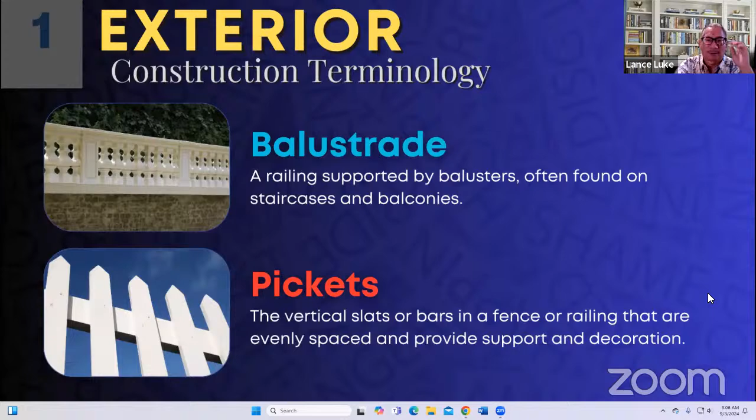If you look at a railing, the intermediate rails are also called pickets. So the balustrade could be pickets also.

I'm just going to breeze through. Facade, the front or face of a building. I think I took this photo on a trip to Italy or somewhere, I forgot where. So that's a facade—if anybody says it's a facade of a building, that's the front or face. If you go to Disneyland, there's a lot of facades, and in the back there's nothing. It's just the front.

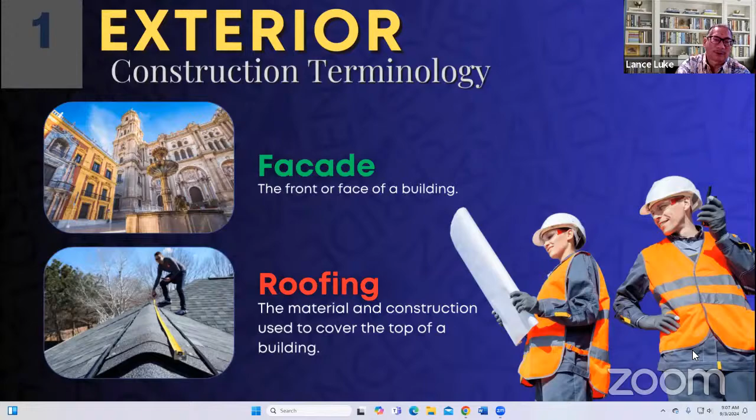Roofing. Roofing is a material, as you know, construction used to cover the top of a building. Roofing could be a verb or a noun, but it's used in different ways. We'll talk more about that later.

How about siding? It's pretty obvious—the siding of a house. Protective material attached to the exterior of a building wall. In old Hawaii, the siding used to be single wall construction, TNG. What's TNG? Tongue and groove—sections of wood slotted and fit together.

There's also siding called stucco siding, or EIFS. What does that stand for? Exterior Insulation Finish System, or EIF, Exterior Insulation Finish, or EIS, Exterior Insulation System. If you go around and look at new buildings, hotels, restaurants, and all that, it looks like stucco, but it's actually synthetic stucco. The definition is exterior wall covering that includes insulation and then the finished surface, usually more energy efficient because there are numerous layers.

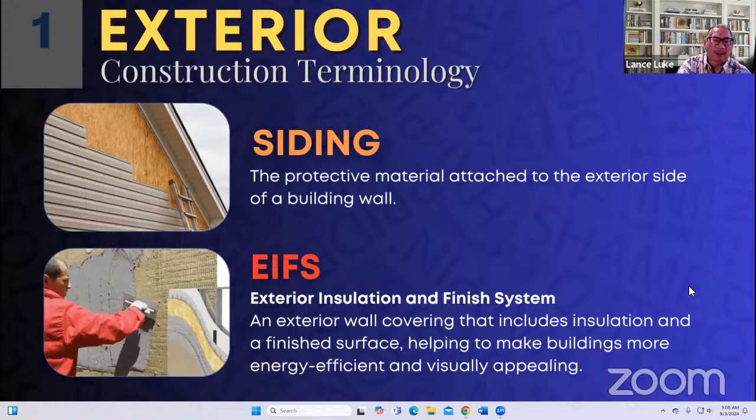If you look at the image on the bottom left, there's a little rectangle section that shows the different layers of this stucco. So we just call it stucco, but if you want to get fancy, you can call it EFIS or EIFS, Exterior Insulation Finish System. When it first came out, there was a lot of leaks into buildings on the mainland because they really didn't know how to apply it.

Cladding is sort of like siding. It's a covering or coating on a building exterior for protection, or sometimes aesthetics.

Now, I threw in this picture of the Grenfell Tower. I was up there in May, and it's a memorial now because the whole building caught on fire, and it was due to cladding. They had this material added to the side of the building, and lo and behold, it wasn't properly fire-rated material. It just caught on fire, and the whole tower was basically on fire.

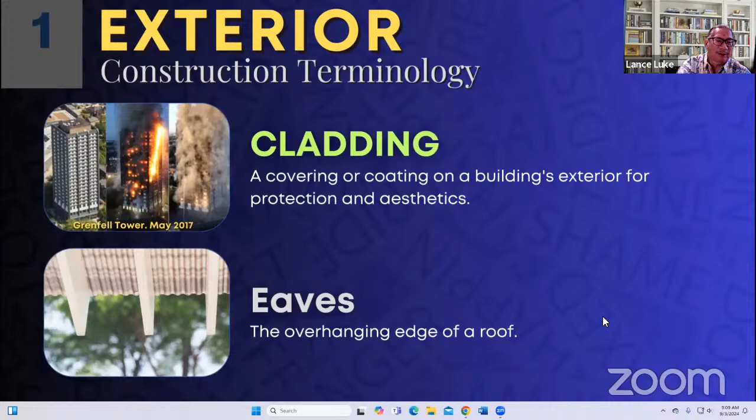So that's cladding. Eaves is the overhanging edge of a roof. If you look at the image, you're standing above it and looking out, and that's the eave.

Let's talk about railing. There's a difference between handrail and guardrail. You may ask, what's the difference? The handrail helps people keep their balance for safety while walking up and down stairs, a ramp, or a slope walkway. A guardrail is actually a protective fence or railing to keep people safe from dangerous drops, and usually a guardrail is on flat areas. A handrail could be flat or vertical, like on stairs or a ramp. A guardrail most of the time is horizontal on flat surfaces, and appears on stair landings, lanais, balconies, and so forth.

So there's a difference between handrail and guardrail. Most times, the guardrail—you don't put your hand on it; it's mainly for decoration, although you could if you're on a hotel lanai or visiting somebody in a high-rise townhouse.

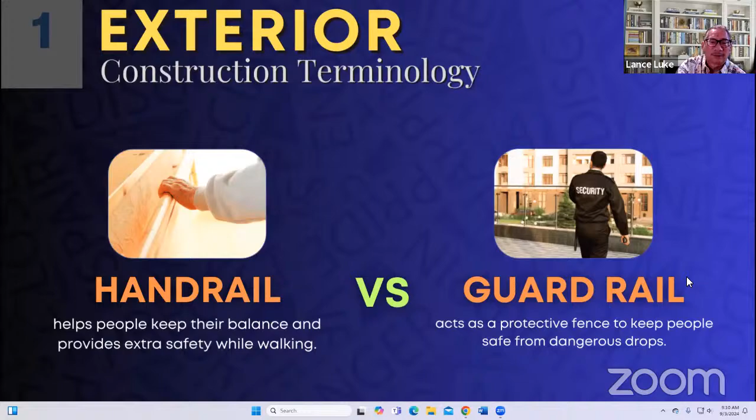Talking about stairs, here's where people get confused. Your contractor talks about a tread or riser, and you're like, what is that? Well, I put a nice photo here. The tread is actually the step of the stairs—that's the tread. The riser is the vertical part. So the tread is horizontal, which is the step, and the vertical riser makes up part of the stair. Just remember, the tread is the flat surface you walk on, and the riser is vertical—you don't walk on that.

How are the tread and riser connected? There's a vertical diagonal piece of wood or concrete, or other material, called the stair stringer. That stringer is a structural support that runs along each side of the stairway, or could be in the center of a staircase, holding the treads and risers. This is a wood frame, but the whole stairway could be made out of stone or concrete, and it's pretty much the same terms.

So it doesn't matter what kind of material your stairway is made out of, you're still going to have components which consist of your tread, riser, and your stair stringer. That's just some information to help you.

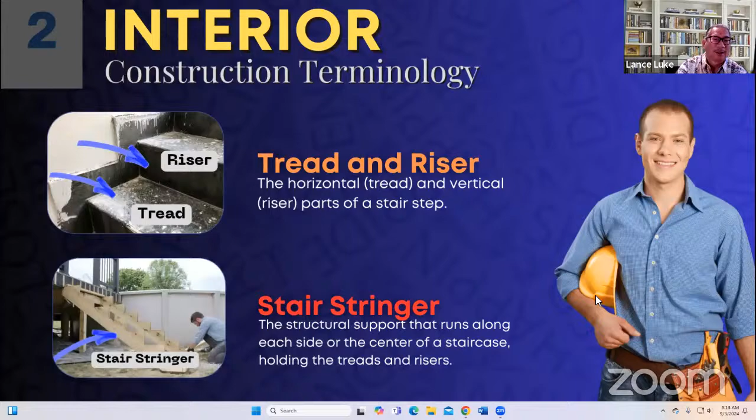Crown molding - why is it a crown? Because it's at the top. So the molding is a decorative trim where the wall meets the ceiling. I didn't even know what crown molding was, because in Hawaii we don't have too much of that unless it's really expensive houses. I learned about it when I had to go to the mainland and take tests for inspection certification. That's how we figured out what it was.

So that's crown molding. You also have other molding - if the molding is at the base of the floor, that's your baseboard. It could be base molding or baseboard. If it's in the middle, like in a dining room, they call that your chair rail. What that is, when you're putting your chairs against the wall, it doesn't make big holes in the wall.

Okay, everybody heard the term drywall. What is drywall? Drywall is actually panels made of gypsum used to create walls and ceilings. So in the old days, everything was made out of wood, right?

Log cabin houses made out of logs, and later on they decided to mill the logs into wood. So you have 2x4, and you have your plywood siding. And the houses were built like that, all wood. Then later on, drywall was invented and said, wow, okay, let's use drywall. So we'll make the house walls and ceilings out of drywall. It's easy to work with. I'll let you know later on down the presentation more about the drywall finishes.

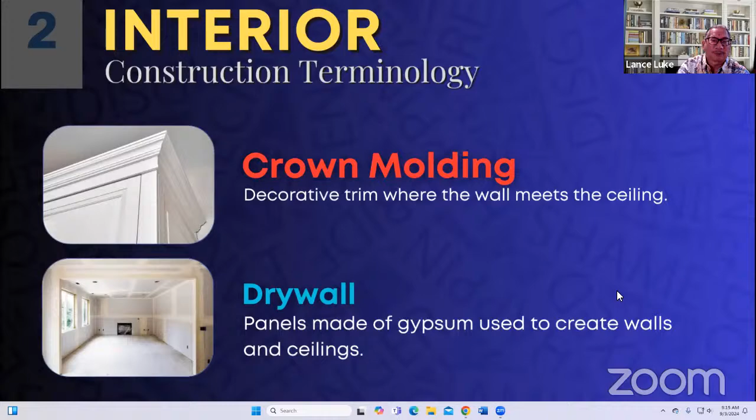There's different types of drywall finishes. What's a stud? Well, somebody like Martin, he works out, but in the construction term, the stud is a vertical framing in walls. The material could be wood, metal, or concrete, but normally if it's concrete, it's called a column. So the stud is a vertical framing member in the walls, and that's what you attach your drywall to.

Wainscoting is a decorative protective panel on the lower part of a wall, but then also the term is used for bathrooms, and that's your tile work.

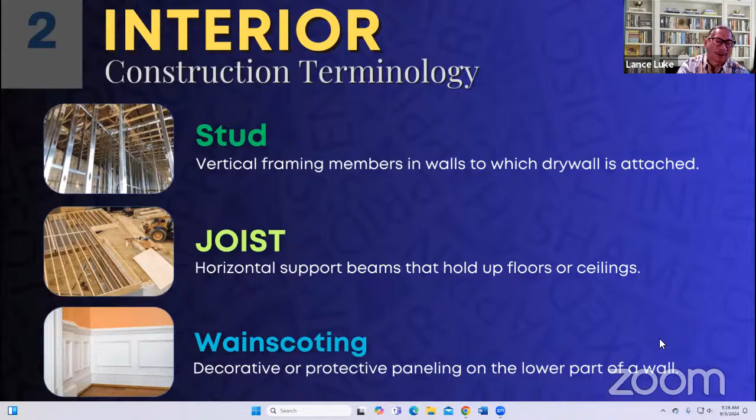A conduit is a protective tubing like a pipe, and they run the electrical wires through that. So the purpose of the conduit is to protect the wires, and also so you don't have a bunch of spaghetti wiring in your walls or ceiling. It just goes through one or two or several conduits.

Circuit breaker - you know what that is, but the proper definition is a switch that automatically interrupts electrical flow in case of an overload or short circuit. I had a call like, oh, something's wrong, my circuit breaker keeps tripping, and every time I switch it on, it trips again, and then I don't have power. They said something's wrong, can I tape it? And I said no, the reason why it tripped is because something is wrong and you need to fix it. You can't just tape your circuit breaker to make it stay in the on position. Your whole house might catch on fire because we don't know what the problem is - could be an overload, short circuit that could start a fire.

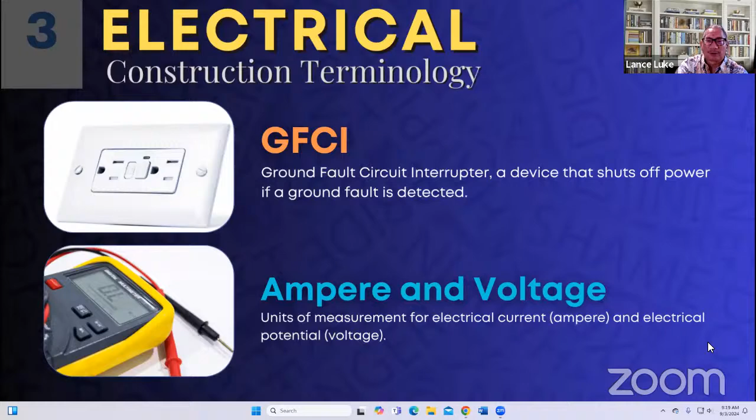Amps and volts, ampere and voltage, units of measurement for electrical current. Electrical current is the amps and electrical potential is the voltage. I'm not going to get too technical in that. What you need to know is just call an electrician if you have problems. Don't try and fix it yourself.

Moving on to plumbing, where we got water flow. There's a shut-off valve, a valve used to stop the flow of water in a plumbing system. In a single-family house, there should be a shut-off valve somewhere between your water meter and your house. If your house is super old, you might not have a shut-off valve, and the valve used to shut the water off would be inside your water meter, which is basically owned by the Board of Water Supply, and you can't touch it.

A vent pipe allows air to enter the plumbing system to maintain proper pressure and flow. If you didn't have vent or air, the water wouldn't flow as properly, and if you flush your toilet or use your sink, it might get clogged because you need the air. You need the airflow.

By the way, any of the terms that I mentioned in this webinar apply to anywhere in the US and even the world. It's pretty much the same.

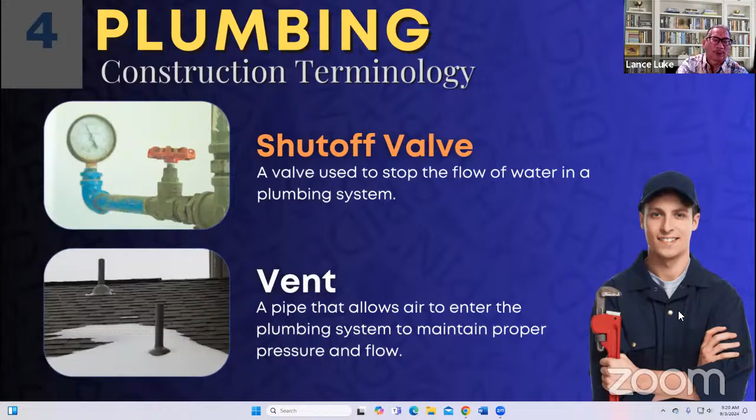Sink drain pipe, there's a P trap, S trap, other traps, but the traps are to prevent sewer gases from entering your house or building. And the reason it's called P is because it looks like the letter P, or the S looks like the letter S. A backflow preventer is a device that stops contaminated water from flowing back into the clean water supply.

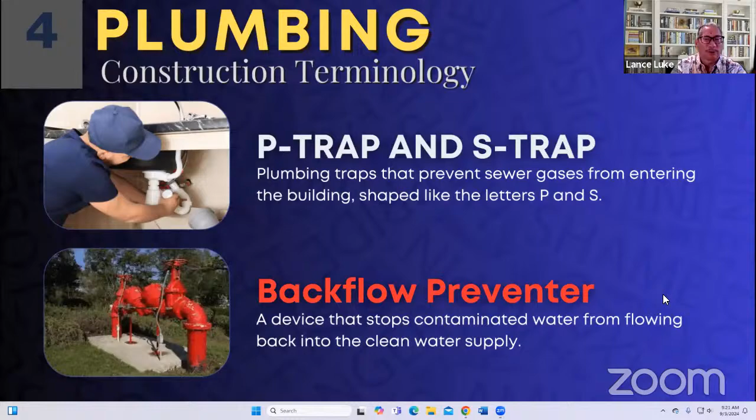Now, if you live in a condo building and you don't have a backflow preventer, you should add one. A lot of older buildings that are redoing their wastewater piping, the city Board of Water Supply is requiring the installation of a backflow preventer, so there's no grandfathering in. You have to do it, otherwise you won't get your permit.

Engineering terms, structural analysis. Well, it's an assessment of a structure's ability to withstand loads. Now, a structural analysis could be reviewing plans before the building's built. It could be inspecting the building during construction. It could be an analysis after the building's built to determine whether it was built properly, or later on, years later, if the building suffers from some failures, that's another structural analysis.

Okay, retaining wall. That's pretty easy. A wall built to hold back soil or rock from a building or land area. And your retaining wall could be made out of anything, any kind of material, block, tile, rocks, wood, reinforced concrete. So all kinds of different materials.

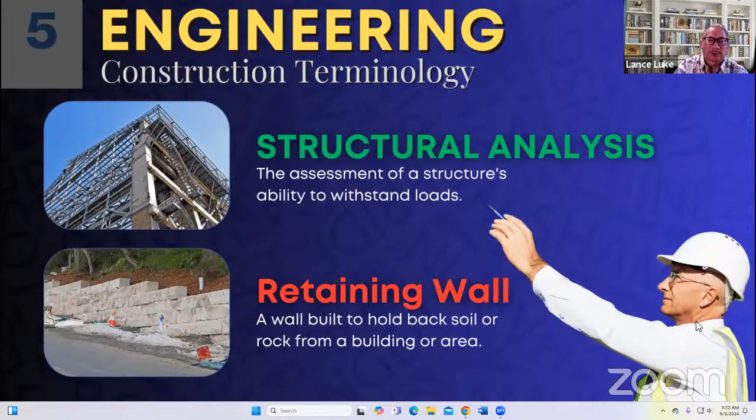Some more engineering. Reinforced concrete is basically concrete strengthened with embedded steel bars or mesh. So the steel bars, it's called reinforcing bar, and the short term is rebar. So when you think of rebar, that's those metal bars that are used. Now, sometimes in driveways, like a single-family house, it may be overkill to use rebar in your walkway and driveway, so they use mesh, which is welded wire fabric, they call it.

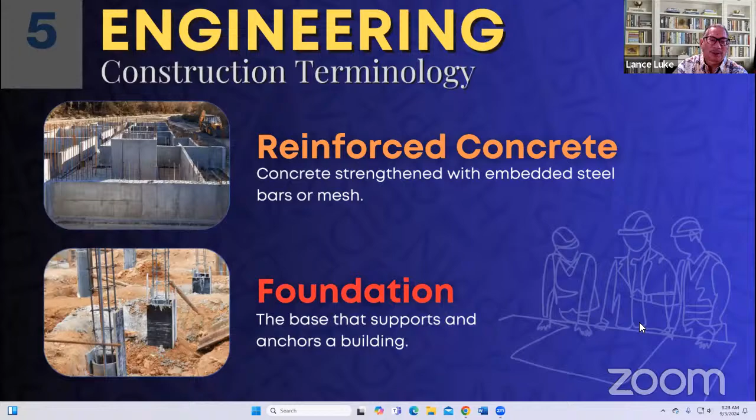And then foundation, the base that supports and anchors a building. So sometimes foundation or footing could be used interchangeably, but it all depends. Let's talk about other terms that don't have to do with building components.

Scope of work. What is that? So when the contractor says, what do you want us to do, we're going to make a scope of work. Well, basically, it's a detailed description of the work to be performed under a contract. When I say detailed, it should be detailed. So let's say you're building a house or having an addition made. There should be a scope of work that's pretty lengthy. It shouldn't be one sentence: we will build an additional bedroom for you.

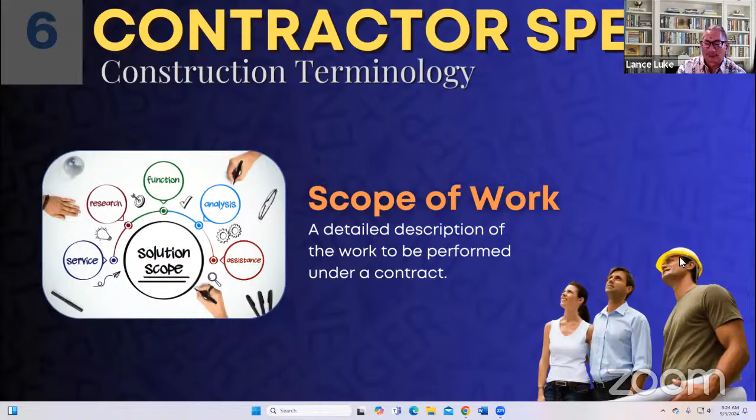And here's the cost. Okay, you want to know what the various components are. I'll talk about that a little later. It's interesting, and you'll know.

What's a bid? Well, you go to an auction, and if you like the item being auctioned, you raise your hand. You're usually holding a piece of paper with a number. Martin and his wife used to go on a lot of cruises, and sometimes on these cruises they have art auctions, and you like a piece of painting. Here's number 24, blah blah blah. The starting bid is $1,000, and then Martin raises his hand, 1,500. So that's different. That's an auction bid.

Okay, that's bidding. This bid in construction is basically a proposal to perform construction work at a specified price. Sometimes the word bid and the word proposal are used pretty much in a similar fashion, but I'll talk more about it later, and I'll clear that up.

A change order, what's that? Any change to the original contract. So it's a document that modifies the original contract agreement. Now, there's a caveat. There could be numerous change orders, but make sure it's in writing. The verbal ones don't cut it. In the projects that I work on, it has to be in writing. Otherwise, if it's not, the contractor doesn't get paid. Okay, so keep that in mind.

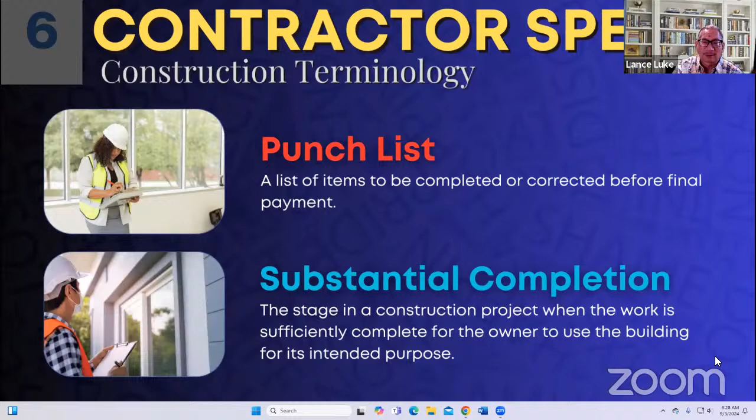So there's a difference. Flashing, let's talk about roofing. Flashing could be on a roof or could be part of a wall. Material used in roofing and walls to prevent water from seeping into joints and seams. So you could have what's called your roof to wall flashing, and you could have a wall to wall flashing. So there's different ways to use the flashing.

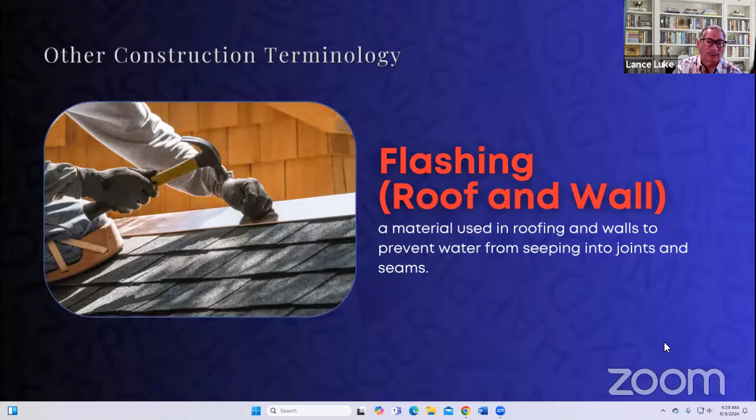Okay, here's my favorite, 2x4 lumber. What's a 2x4? That's a piece of lumber, right? Could be a stud like Martin. Well, that's fine. The 2x4 refers to lumber with a nominal size of 2 inches by 4 inches, typically used in framing.

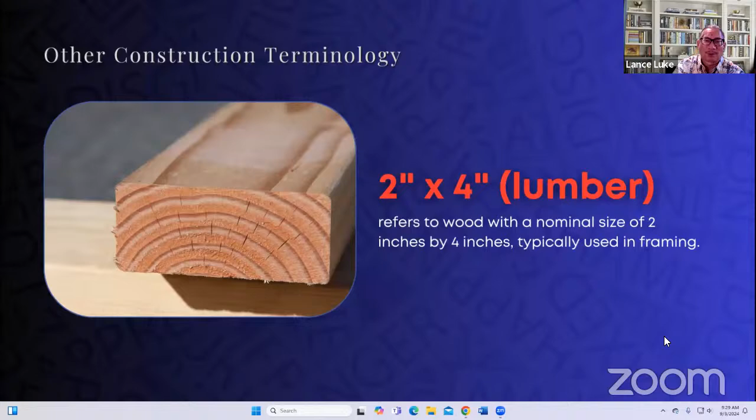Okay, that's a 2x4. But did you know that the dimensions of the lumber today are not 2x4? They go, well, why did they call it 2x4? Well, in the old days, okay, it was 2x4, it was actually 2 inches by 4 inches. So there's what's called nominal versus actual size. The difference between the labeled size and the true size of materials like lumber or pipes. But in this example, we're talking about lumber. So in the old days, it was actually a 2x4.

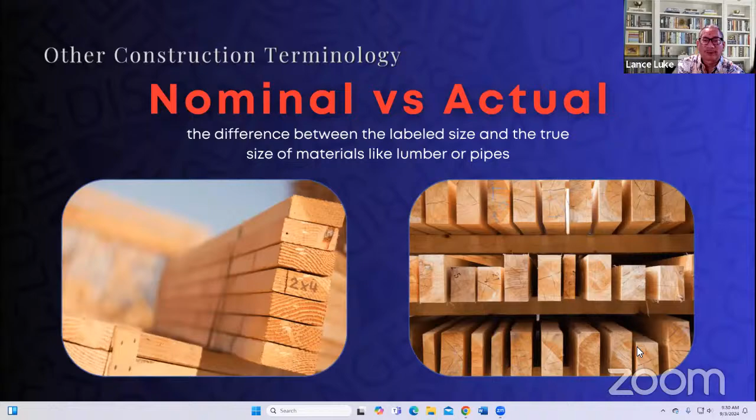What is it today? It's called a 2x4, but the dimensions are not. Okay, the nominal is the actual size of the wood before milling and before it gets sent to Home Depot, let's say, or Lowe's or City Mill. So the original was nominal, 2 inches by 4 inches, but today's standard is actual: it's 1.5 inches by 3.5 inches. If you don't believe me, take a tape measure and go to City Mill, Home Depot, wherever, and go measure it, and then you'll see.

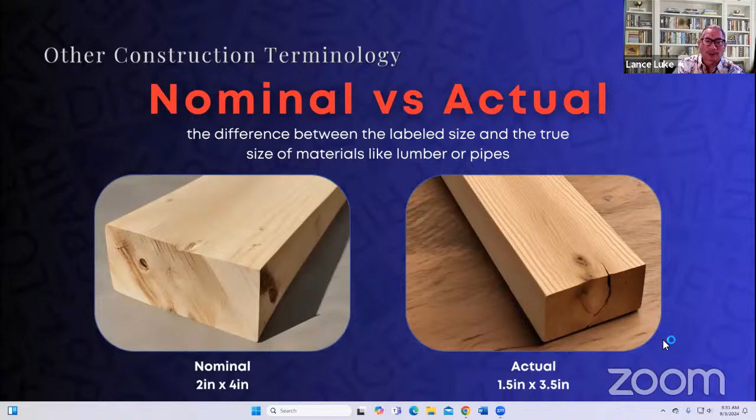And why is the difference? Because in the old days, everything was the nominal size, right? Now it's actual sizes. So it's not only 2x4, as you go through like 4x8, 4x6 beams and all that, it's similar. You got to cut off like half an inch from the nominal dimension.

You've heard the term 12-inch or 16-inch on center. A lot of contractors say, we're going to build this 16-inch on center and you're going to have solid walls, blah, blah, blah. But what does it mean? The definition: wood studs, 2x4s, are spaced 16 inches apart from the center of one stud to the center of the next. So if you measure your vertical studs and it's 16-inch on center, then that's 16 inches apart. That's what it means.

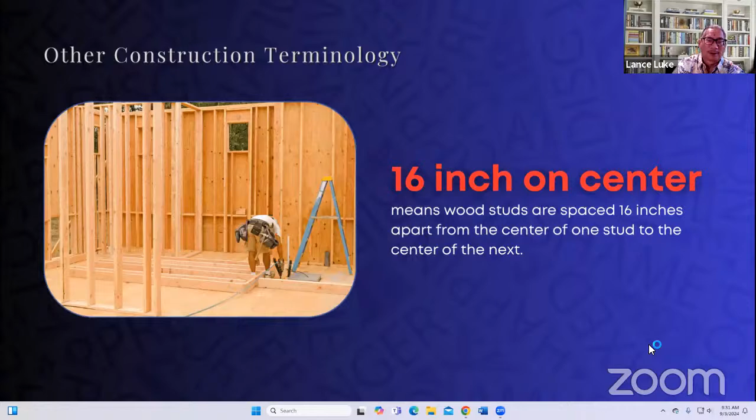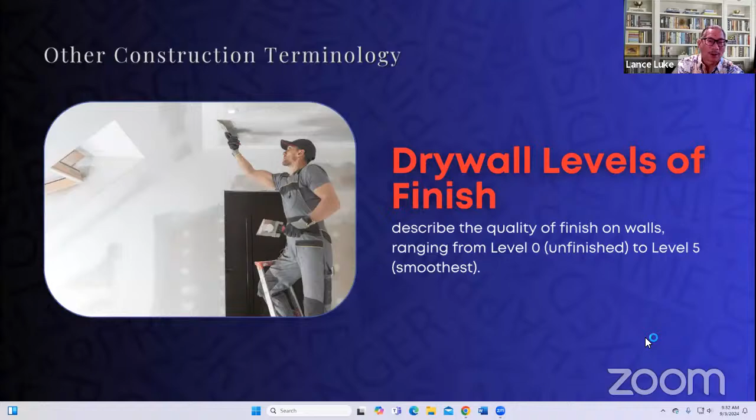Let's go back to drywall. Here's the drywall levels of finish. Did you know there's like 6 different levels of drywall finish? It's the description of the quality of finish on drywall, ranging from 0, which is unfinished, to level 5, which is the smoothest. Most of you don't know this, and here's where the contractor gets tricky, because in his contract he doesn't specify the level. So if you're remodeling or building a new house, make sure the contract actually specifies it's written in: all drywall will be level 5 finish inside the house. In the garage, it could be level 4 or something like that. So here we go, levels of drywall finish.

Level 0: the drywall boards are just fastened to walls or ceilings only, like in the picture, and all you see is the nails. It's just hung. There's no finish taping or drywall mud or anything. It just looks unfinished, right? That's sometimes what you see in the garage when new houses are sold.

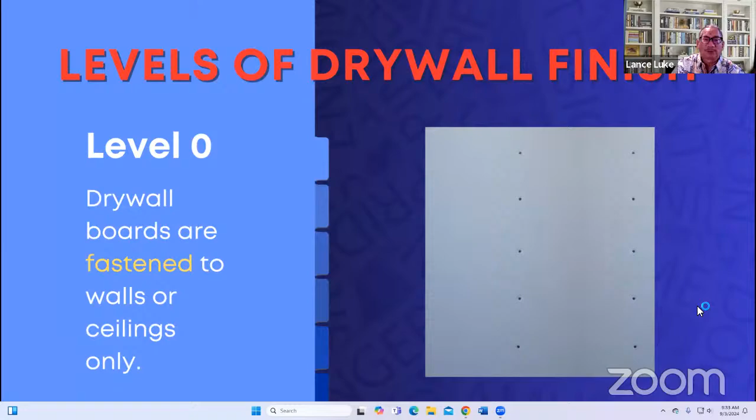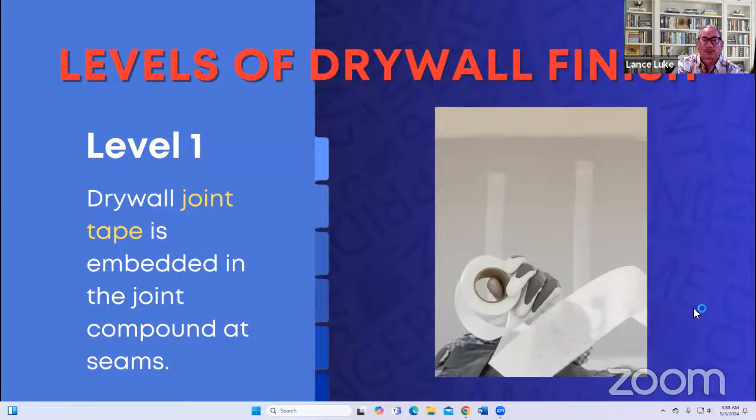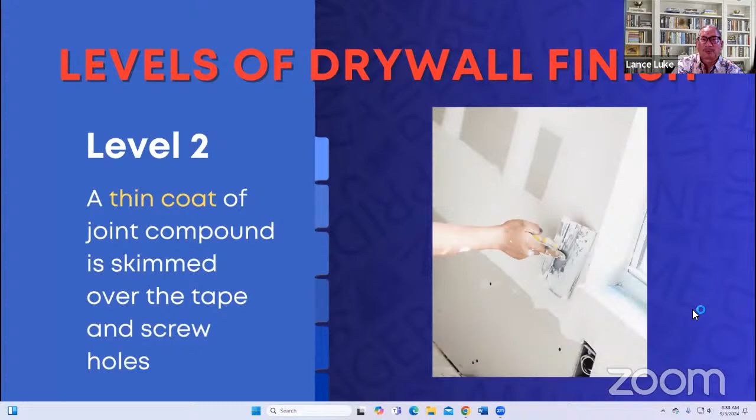What's level 2? You apply a thin coat of joint compound and it's skimmed over the tape and screw holes. Is it ready to paint? No, it's not. You know why? Because there's a thin layer that is not sanded.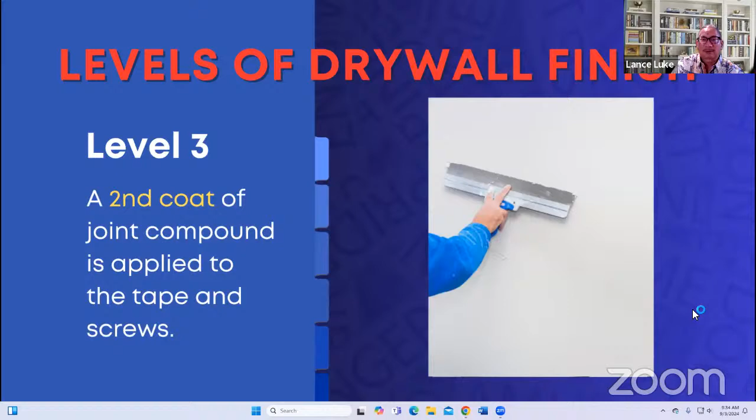Is it? Let's talk about level 4. Level 4 is when another coat of joint compound is applied and the surface is sanded. So do you think ready for paint is level 3 or level 4? You're right, it's level 4. So don't accept a level 3 drywall finish and then have them paint over that.

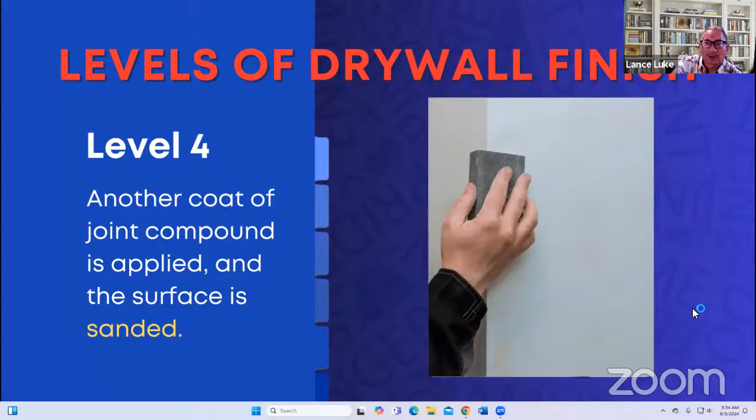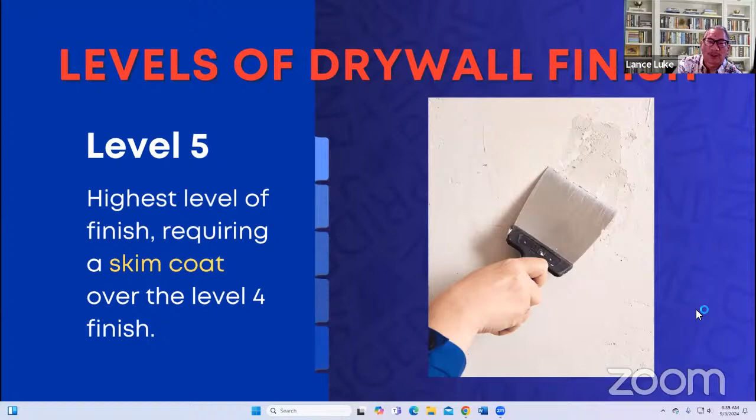Level 5 is your highest level of drywall finish, requiring a skim coat over the level 4 finish, smoothing out any defects or deficiencies. When you look at the wall, it's almost perfectly smooth, ready for paint, ready for wallpaper, good things like that. I've seen many contractors paint over a level 2 or 3, and that's why it looks horrible.

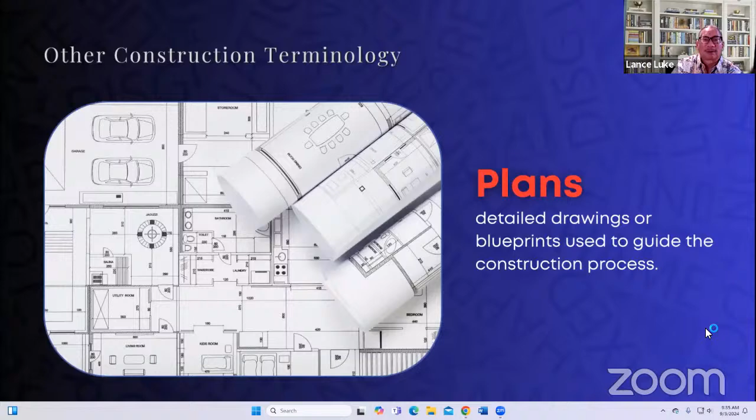Let's talk about building plans. What are plans? Plans are detailed drawings or blueprints used to guide the construction process. So when somebody says plans and specs, what's the specs? Specifications are written documentation that outline the materials and workmanship required for a construction project. So here's the difference: a plan tells you what to build, a specs will tell you how to build it.

A plan for a roof would say: build the roof framing with 2x4 rafters spaced 16-inch on center with plywood roof decking. That's what the plans will say. Then the specs would say we want a certain type of roofing paper, and a certain type of roof shingles, 30-year, 40-year, or 50-year asphalt shingles with a warranty of 30, 40, or 50 years. You've got to specify it, and you want the specific brand. That's the difference between plans and specs.

Can a contractor build just on plans, not using specs? Yes, they can. Will the construction be in accordance with what the contract says? Maybe, maybe not. Most likely not.

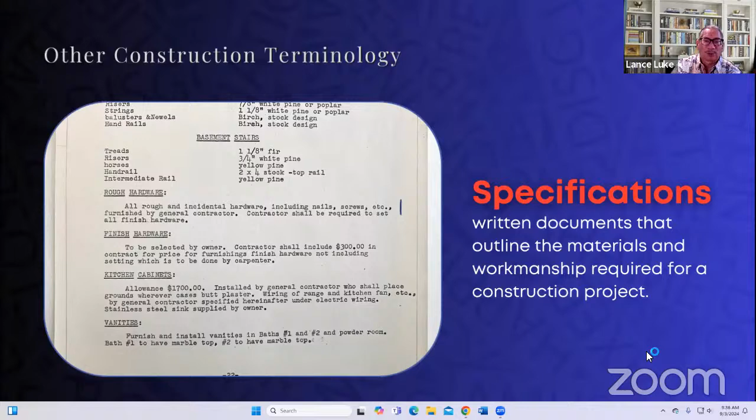Because if you're not clear on what kind of material to use, then you're just going to get whatever the contractor feels like. Have you heard of LEED construction?

LEED is a certification for environmental sustainability building practices. LEED is an acronym that stands for Leadership in Energy and Environmental Design. So if you're building one, or you've heard of buildings that won LEED certification, that's good. And it's not only residential — office buildings and hotels can have LEED certification too. To me, that's a good thing. It saves the environment.

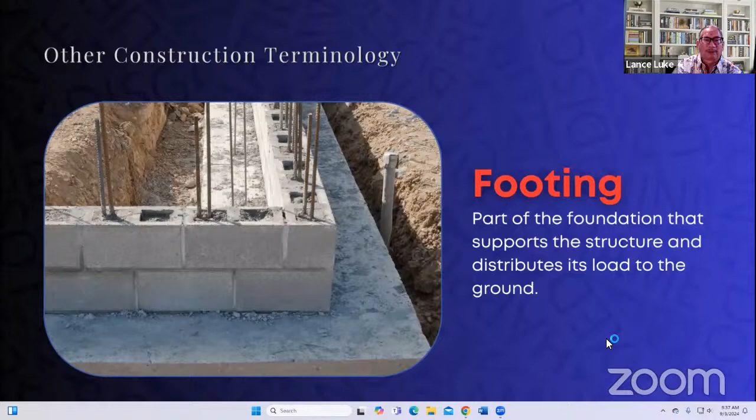Moving along, remember we talked about foundation? Now we're talking about footing. Footing is the part of the foundation that supports the structure and distributes its load to the ground. In this case you can see a wall being built, sitting on concrete. And here's another definition: the part of the foundation that supports a structure and distributes its load to the ground.

Now, I inspected the Millennium Tower — it's a leaning tower in San Francisco — and they used friction piles. If you look at the image here, the friction pile is on the right. Then you see that dark area on the bottom? That's actually bedrock. The reason the tower is leaning is because their piles, their footing, didn't go all the way to bedrock. And so the fix now is attaching the building all the way to bedrock. So they made a big error.

I don't think they realized that that building site was a swamp before. In San Francisco, the whole financial district area was a swamp, so the soil isn't that good.

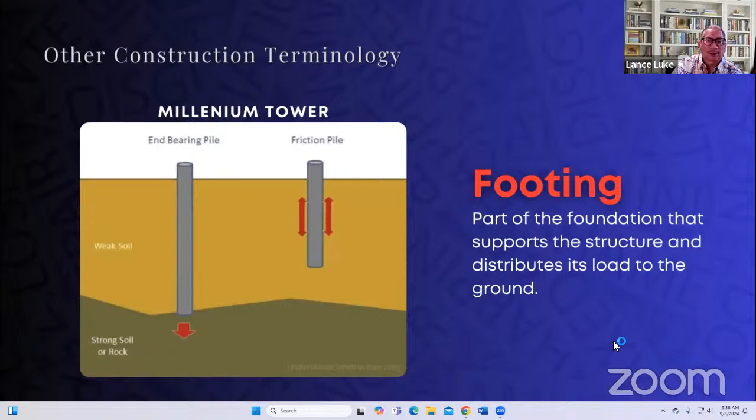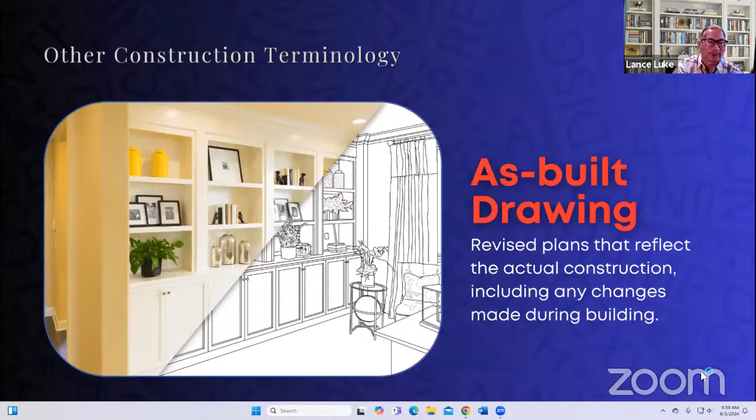As-built drawing: revised plans that reflect the actual construction, including any changes made during the building construction. This picture isn't an as-built drawing, just an illustration. You have a set of plans, right, that's how the building is going to be built. But if they change things — walls, windows, the location of electrical or plumbing shown on the original plans — the as-built drawings correct that. In other words, the as-built drawing is supposedly the actual drawing of how the construction was at the end of the project. The real story, not the original plans. But believe it or not, I've seen some as-built drawings that were incorrect, so that's a heads up.

RFP, request for proposals. It's a document inviting contractors to submit proposals for a project, including cost estimate and plan. So when I go out to bid on my projects, I put together an RFP, and it could be one page or twenty pages — it all depends on the type of project. Basically it says, dear contractor, you're invited to bid on this project, and here's a description of it. Then if you want to include building plans, if you have them, fine. If you want to include photos or other caveats, that's the time to do so.

Procurement policy: procedures for acquiring goods and services for a construction project. Mostly this applies to government construction projects — DOE, or take for instance the Honolulu Rail. That's a procurement project where they have to follow strict guidelines, which is why there's so much red tape. There's a to-do list to follow, and you've got to follow everything to the T.

Contractor versus licensed contractor — what's the difference, right? A contractor is a person or company that undertakes a contract for construction, while a licensed contractor is one that has formal certification and has passed tests to get licensed to do and perform specific work. Now there's also a difference between a general contractor and one that isn't — which would be a subcontractor, a specialty contractor.